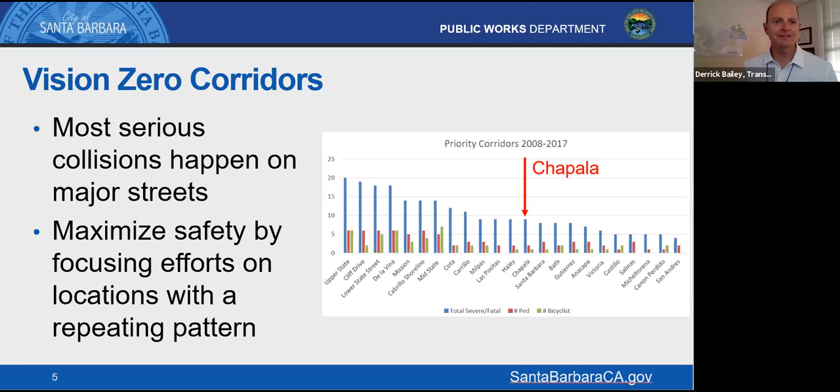The highest individual location is Arrellaga Street with 7 collisions, but overall the collisions were spread out along the corridor. The total number of intersection-related collisions at Arrellaga, Valerio, Islay, and Pedregosa added together was 18. There were 7 reported collisions into parked vehicles, but we know anecdotally that not all of these get reported, so that number is probably higher.

Interestingly, if we go back another 5 years and look at 2010 to 2014, there were 29 collisions resulting in 19 injuries, so the numbers are very similar for that period. This tells us there's a pattern going on here on this corridor, and if we don't do anything, 5 years from now when we do a collision analysis again, we're likely to see another 19 people injured between now and then.

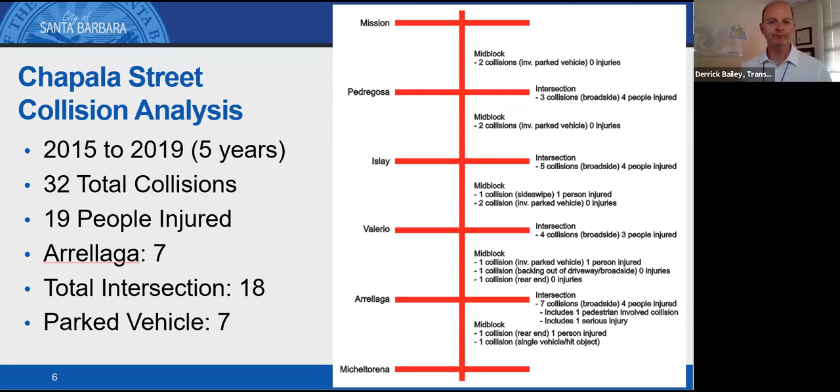19 of the 32 collisions were broadsides. 18 of them were at intersections. There was 1 at a driveway and 15 injuries resulting from these collisions. On the right, it shows there's also some side swipe type collisions that happened in the middle of the block too. Next slide, please.

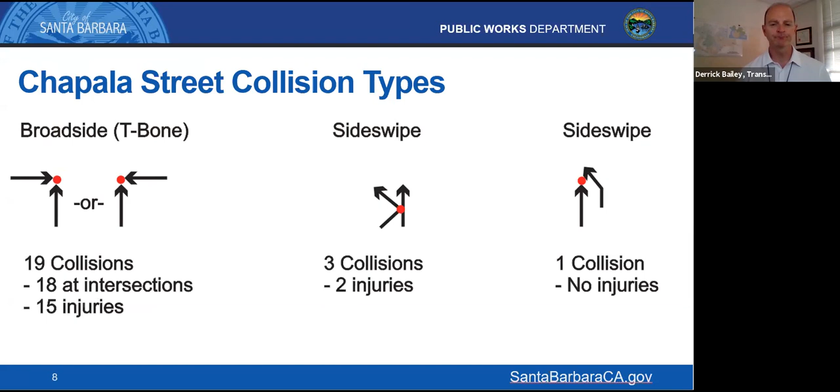So a question to ask is whether 32 collisions and 19 injuries is a lot. It's a good question. So we compared this 5-block segment of Chapala Street to other 5-block one-way street segments in Santa Barbara. Chapala Street has the 2nd highest collision rate and injury rate when factored for the amount of traffic. The highest segment is on De La Vina Street below Carrillo, which has a safety project planned for construction in 2022.

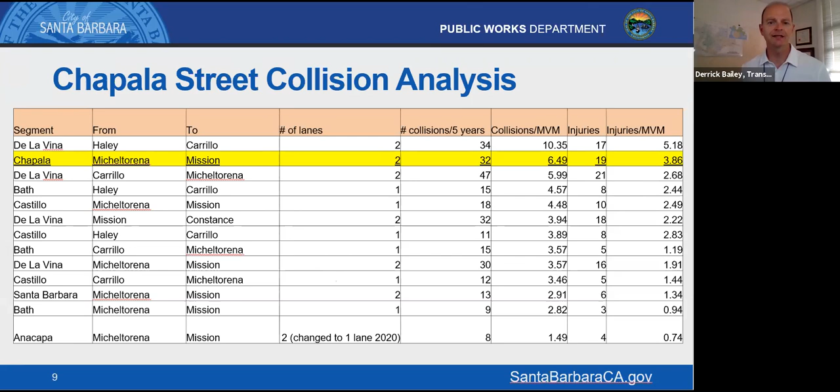Next slide. So given this pattern of collisions and the specific types happening on Chapala Street, what should be done? Also a good question. So based on the collision data and patterns, we're proposing a new traffic signal and intersection lighting at the Arrellaga Street intersection. That'll address the broadside collision pattern there. But if you remember, Arrellaga Street accounted for 7 of the 32 collisions, so that's only 20% of the collisions happening on the corridor. So a traffic signal alone isn't going to have a huge impact on the overall corridor.

It'll definitely make that intersection more safe, but again, the overall corridor has a lot more going on. So to address collisions north of Arrellaga Street, we're proposing a lane reduction, going from 2 lanes to 1 lane. This will address speed, address broadside collisions at other intersections, reduce collisions into parked vehicles, and eliminate those side swipe collisions we were talking about. Next slide, please.

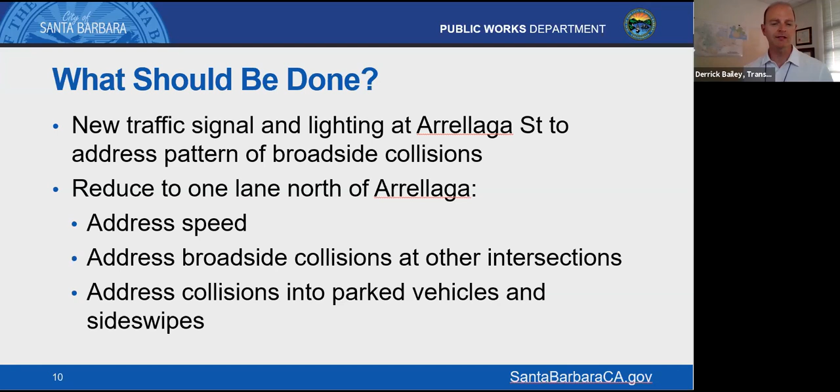So the next block up, between Micheltorena and Arrellaga, has about 7,400 vehicles per day. Again, there's a very heavy left turn movement going towards the 101 northbound on-ramp. And then north of Arrellaga Street, all the way up to Mission Street, it's in the mid 5,000 range. So that's very doable as far as 1 lane of traffic.

Just to compare to some other streets in Santa Barbara: Anacapa Street near Arrellaga, completed last year, has about 5,900 per day. Bath Street varies between 3,000 to 4,600, and Castillo Street from 3,800 to 4,400. There are a couple of upcoming projects planned similar to what we're proposing here on De La Vina Street. The one just south of Constance near the Cottage Rehab Hospital has over 9,000 vehicles per day. So, like I said, this is well within the range of functioning well for a one-lane street.

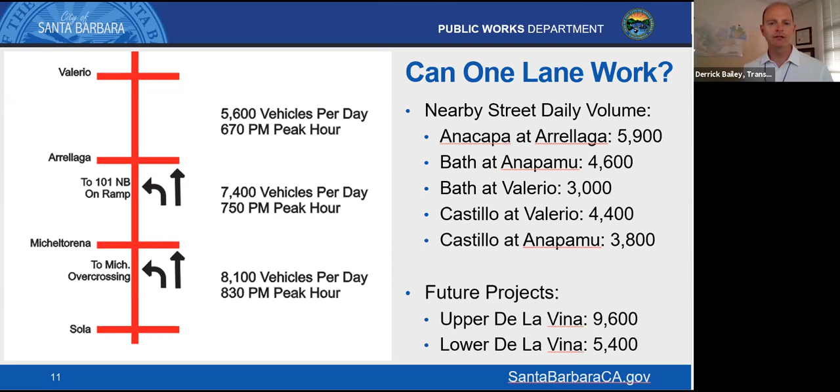At Valerio Street, there would be 1 lane northbound. Islay, 1 northbound. Pedregosa, 1 northbound. And then that block in between Pedregosa and Mission, due to capacity reasons at the traffic signal on Mission Street, it needs to open back up to 2 lanes right there. If we don't do that, we're going to get block-long queues during the peak hours. So that's an important feature right there.

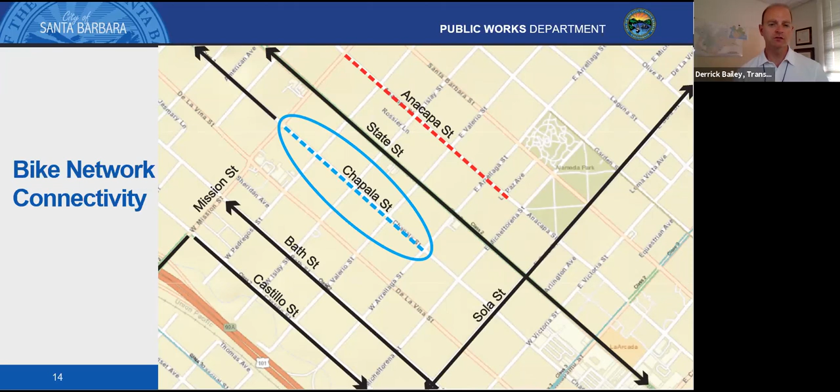But for Chapala Street, shown in blue, there is an existing bike lane that begins north of Mission Street. So we think cyclists are going to want to use Chapala Street with a lane reduction.

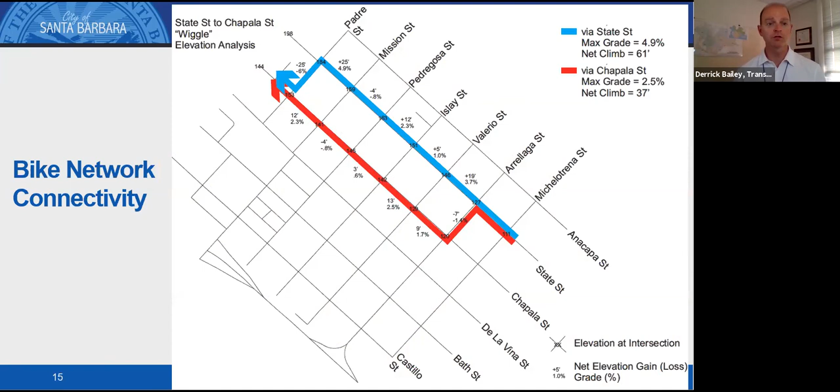We also looked at elevation gains on Chapala Street versus State Street, 1 block over. State Street has some relatively steep hills for cyclists to climb, whereas Chapala's blocks are much less steep. So again, we think Chapala Street is probably going to be well used by cyclists, and they will prefer to use that street with a lane reduction.

One thing we have to think about is that 1 lane to 2 lane transition. That needs to happen again between Pedregosa and Mission for capacity reasons. This means there needs to be a transition from 1 lane opening up to 2 lanes in that block, approximately where that red dot is on the map.

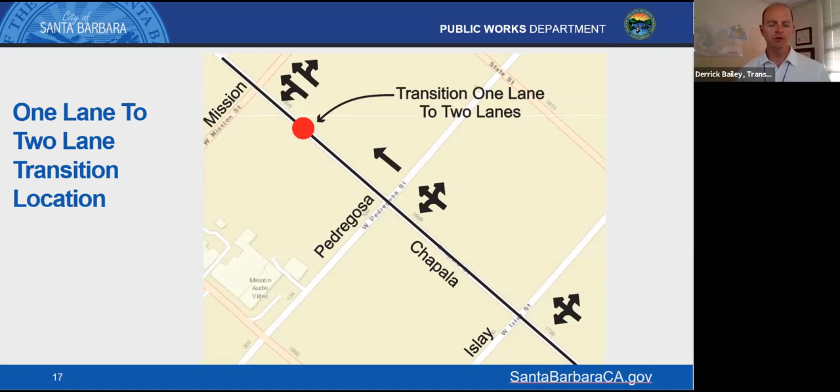That would be the most likely place a collision would happen if we were to use a similar configuration on Chapala Street. So for that reason, we think the bike lane should continue all the way up to the intersection.

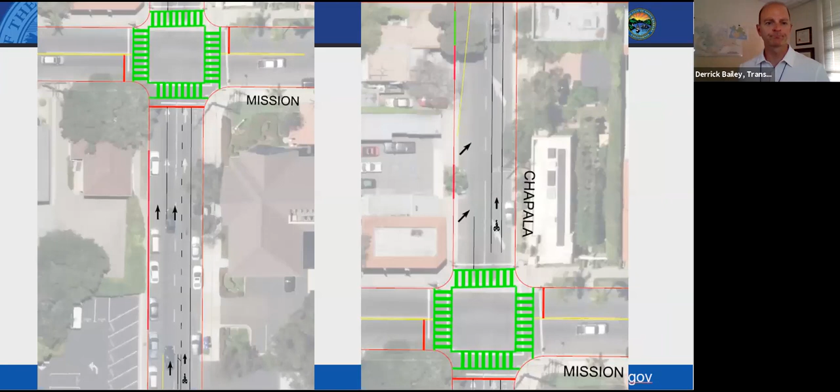This just shows the lane configuration for what we're proposing on Chapala Street. On the left-hand side of the screen, that shows south of the intersection. You can see that the bike lane on the right-hand side goes all the way up to the intersection, and the second lane will open up on the left-hand side of the road.

This is where the parking removal would be needed, about 6 spaces south of the intersection—you can see the red stripe on the curb indicating a red curb. There will also be 2 spaces needed on the north side of the intersection, on your right-hand side, and that green zone would be moved 1 space up. We've identified 1 space on the east side of the road that we can turn back into parking, so the net parking loss would be 7.

We really struggled with this. We understand how important parking is in the neighborhood—we hear this all over Santa Barbara that parking is important. We are also struggling with how we eliminate collisions resulting in injuries in the city and keeping people from ending up in the hospital. So that's how we landed at this configuration.

So what are the trade-offs? We just talked about the loss of parking on Chapala Street, in my mind, clearly being the biggest trade-off with this project. There's going to be a slight increase in side street traffic delay. Right now, traffic is spread out in 2 lanes on Chapala Street. If it's all concentrated into 1 lane, there will be fewer gaps, but the increase in delay is likely going to be fairly minimal. There'll also be an increase in corridor travel time if you're on Chapala Street driving up from Micheltorena towards Mission Street, likely around 10 seconds average, but that could be a little higher or lower depending on traffic.

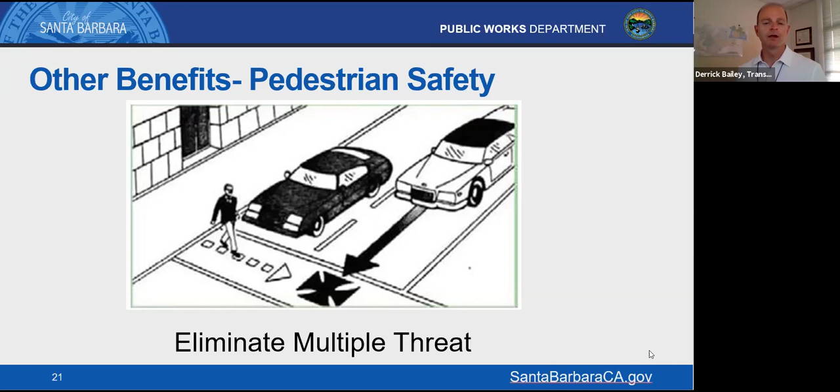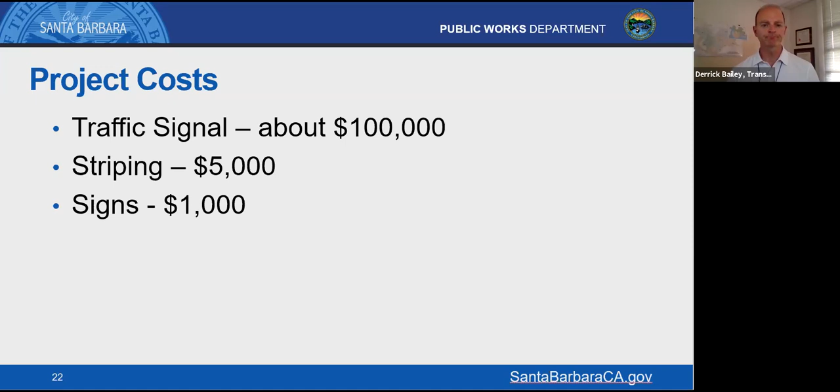Next steps: tonight is just an informational meeting, trying to get information out to the community. Next Thursday this same information will be presented to the city's Transportation and Circulation Committee, an advisory committee to the City Council, so it's an opportunity for the public to come and speak and be heard. Sometime later this summer, probably August or so, this will go to City Council for approval, another opportunity for public input. Construction is planned for late 2021, early 2022.

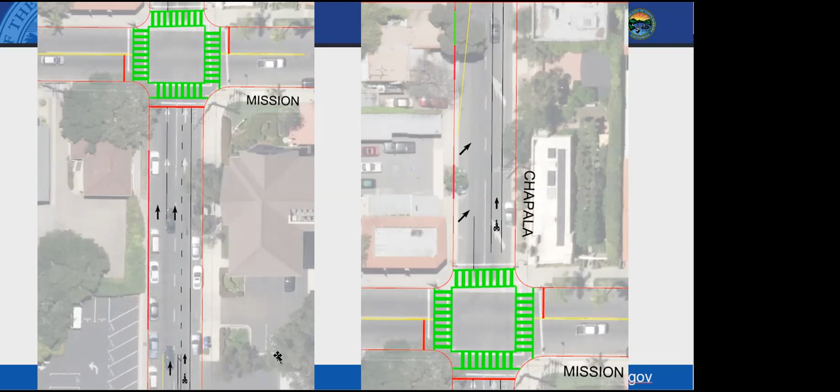I wonder if we could do something creative, like allowing those of us who live and work here to have a permit so we can park in the 90-minute zone without the 90-minute limit, or something similar. I'd just like to see some attention given to this issue for those of us who will be impacted that way.

Thanks, Naomi. Yeah, thank you, that's a good suggestion.

Just to add to that, we did find one space on the east side of the street. There's a little area in the middle of the block between Mission and Pedregosa that currently has an asphalt sidewalk, which will be rebuilt into concrete, along with the driveways. Between those two driveways, we'll actually be able to create enough space for one full-size parking space. So we're going to continue scouring the neighborhood for more space, in addition to examining your suggestion. Thank you.

Okay, the next question.

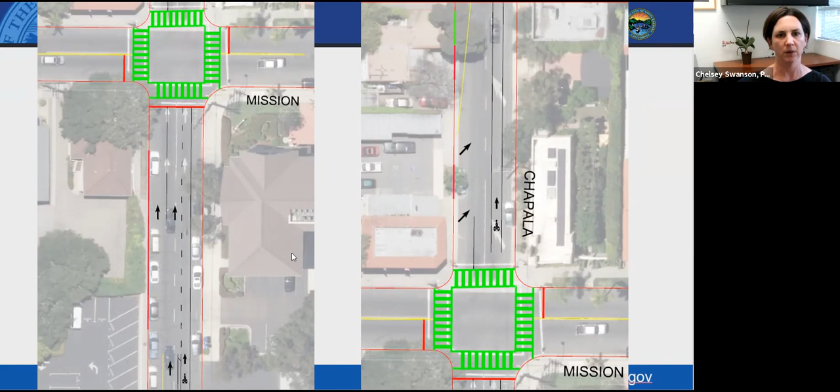Appreciate all you do. We live at Chapala and Pedregosa, and have a few observations. One, north of Mission, the bike lane has very inadequate marking. Two, cars north of Mission drive in the bike lane all the time. There's also a question - doesn't it make more sense to put a light at Islay? And a comment that there is never police speed enforcement on Chapala. Sorry, that was a lot of parts, I can reread any of it.

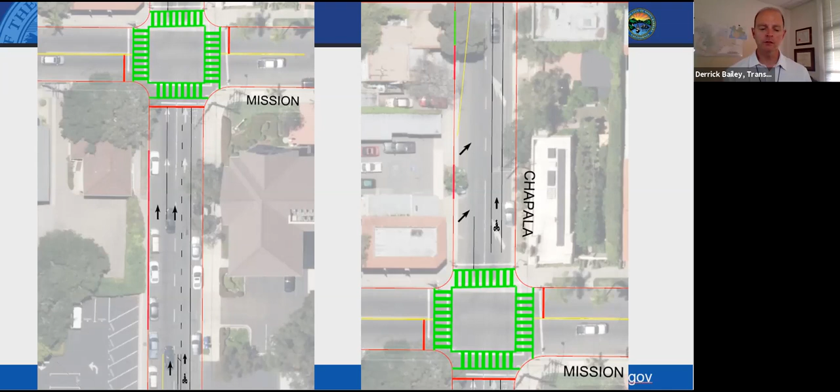I'll start with north of Mission Street. That section is going to have a slurry seal project later this summer, so all the traffic markings will be redone as part of that project. In the past we used traffic paint, which wears out after being driven over enough times. We're now using a much higher quality material called thermoplastic, which actually has some thickness to it. When Mission Street was repaved a couple summers ago, all the markings were put back in thermoplastic instead of paint. Normally, two years later, paint markings would be quite faded, but on Mission Street they're still in pretty good condition. Higher quality markings are going back in north of Mission Street with the slurry seal project.

I think there was also a question about the light being at Islay. Correct, it's an interesting question. One benefit of traffic signals is that we can time them for whatever speed is appropriate for the neighborhood. On our one-way streets in Santa Barbara, most are timed for 25 miles an hour, so if you drive a consistent 25 miles an hour down the street, you'll hit all the green lights. That's how the new signal at Arrellaga is going to be set up.

On Mission Street, southbound from Mission down towards Arrellaga Street, we're going to install a sign sometime this summer up at the De La Vina Street and Mission Street traffic signal, saying the traffic signals are timed for 25 miles an hour, just to encourage people not to go too fast, because if you go too fast, you're just going to hit the red light.

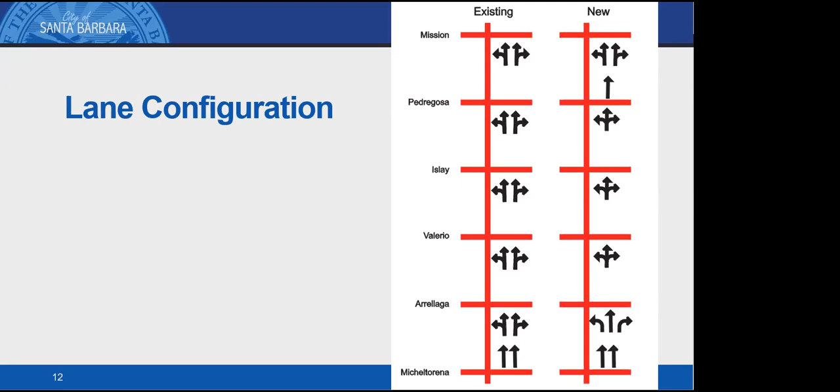Thanks, yeah, we'll look at that too. So if I heard you right, your driveway is on Mission Street. Yeah. Okay, yeah, we'll follow up on that. It's on the north side of Mission, so there's a few driveways on the north side of Mission on that block. Yeah, we'll follow up on that.

And regarding the automatic pedestrian light, we call that putting it in recall, so it recalls every time. The way the light is set up at Mission Street and Chapala, there are detectors on the side street, as well as push buttons for pedestrians to cross Mission Street. The reason those are there is because Mission is such a busy street and doesn't have a left turn lane if you're going eastbound on Mission Street. So if somebody is trying to turn left to go north on Chapala Street, traffic can back up all the way to De La Vina Street.

To put in a left turn lane would probably eliminate a good 5 or 6 parking spaces, which we try to avoid. And that gets back to the traffic signal: we need to have as much green time as possible facing Mission Street, so it's constantly trying to clear that queue in case somebody is turning left and holding up traffic. So when there aren't pedestrians there, if that light is cycling every time, it's probably holding up traffic unnecessarily. We'll look at that and see if there's another solution, but as far as keeping traffic on Mission Street going, recall wouldn't be the best thing for it. Okay.

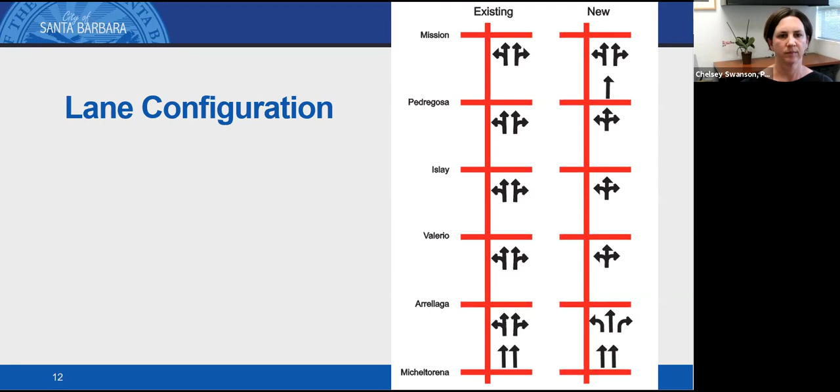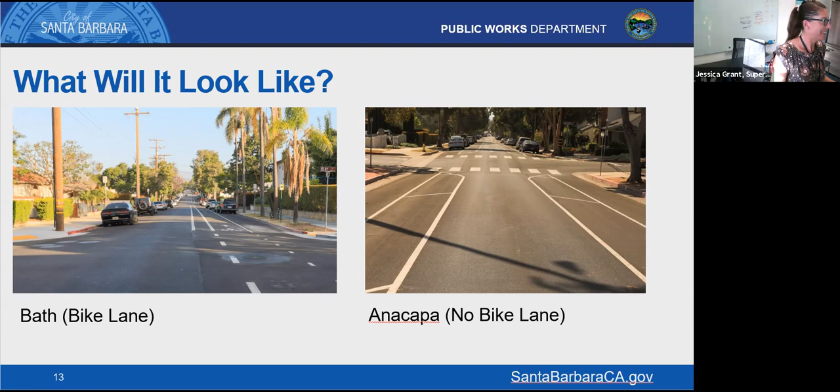Looks like the signs on the street are pretty effective. It's good to know. Very good.